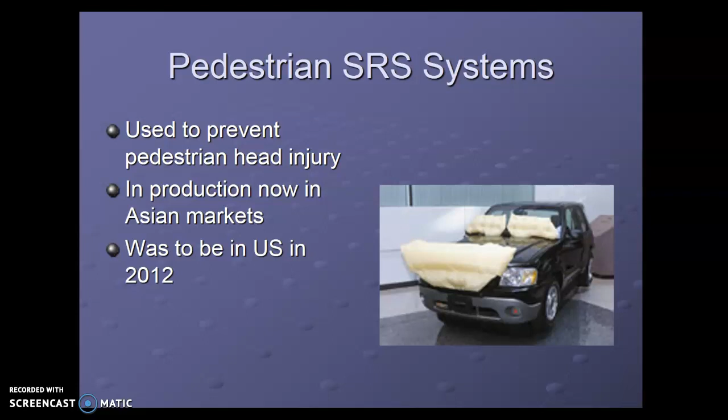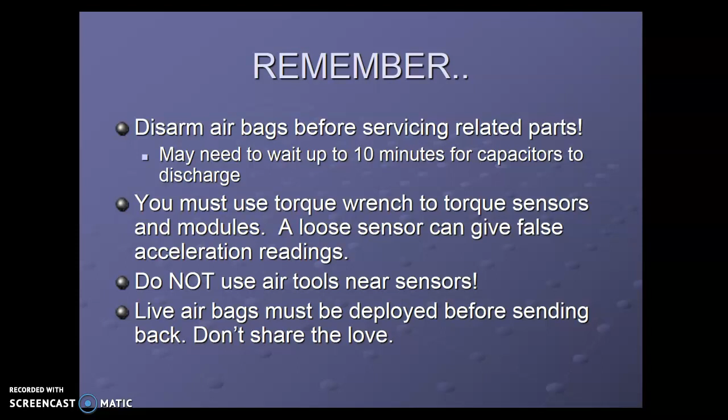Live airbags must be deployed before sending back. That is basically for recalls, if you have to ship them, etc.

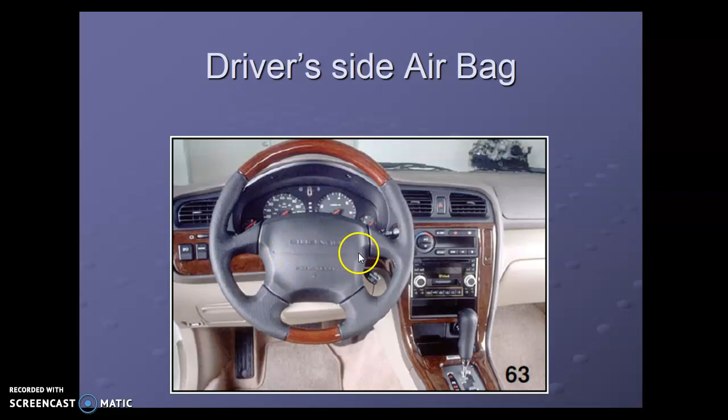Driver side airbag — most of you are familiar with that in the steering wheel area. There's a seam designed as a weak link to open up for the airbag to come out. The multi-stage, as we mentioned earlier, uses those two squibs to control the rate of inflation.

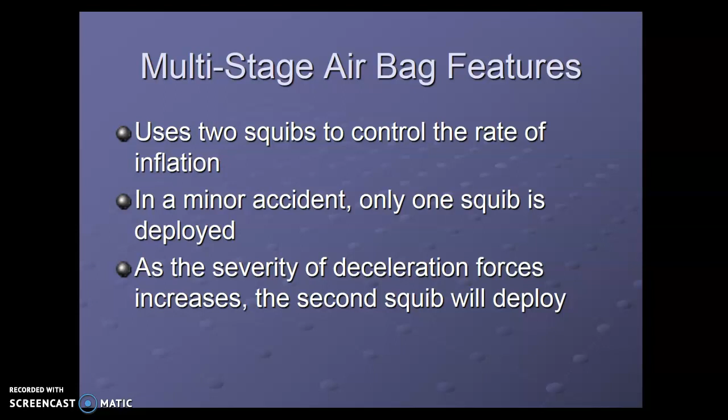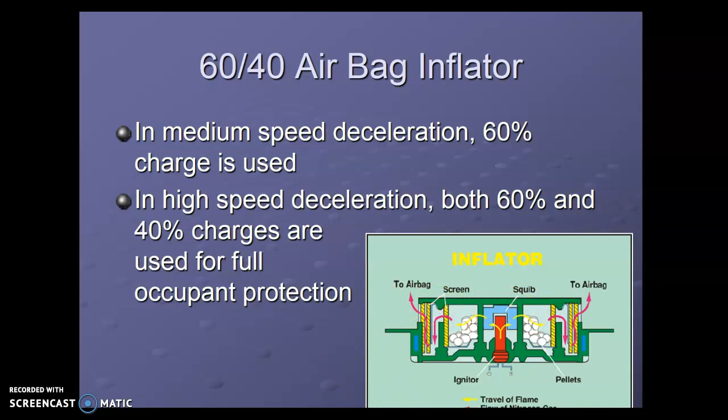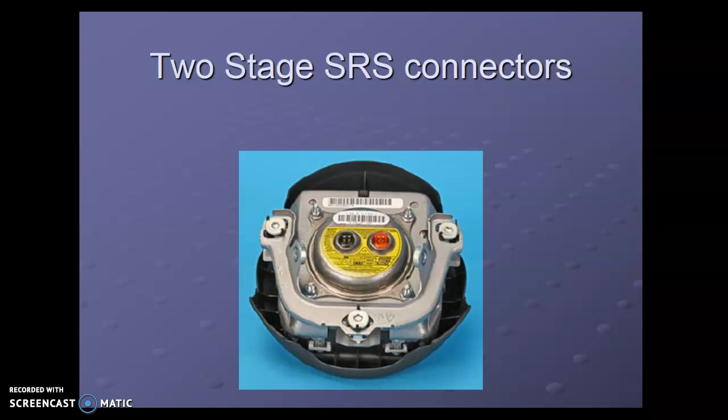In high-speed deceleration, the 60 and 40 charges are used together for full occupant protection. Here's your two stages, and again it depends on the system how they deploy that. Some systems are strictly two stages, some I've seen three, old ones were one. It just depends on the manufacturer and how they engineer it, I guess.

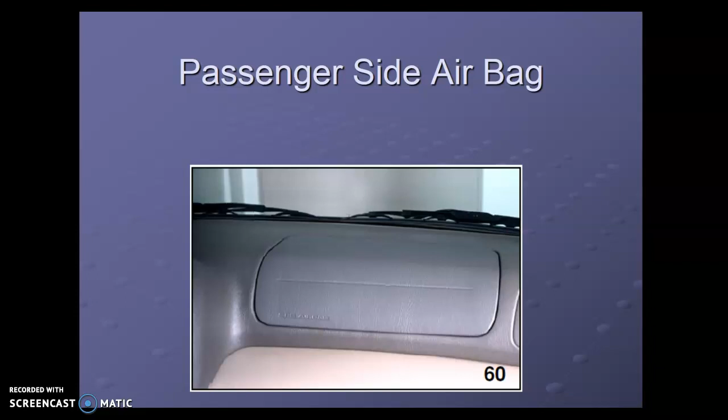Here's your passenger side and that split seam of the airbag where it's going to weak-link and come out. Something to know about the passenger side — they're much larger than the driver's side because they have to travel a greater distance, since passengers are usually further from the dash than the driver.

They deploy with the driver's side airbag on most systems. Some systems have cutoff switches, like pickup trucks where there's no back seat — could be an add-on kit, but you don't see that at all, since not many manufacturers want to modify the system for liability reasons. But most new vehicles either have a sensor or a switch that can turn off the passenger side airbag, and these are on vehicles that don't have a back seat.

So if you had to transport a child in a car seat, or even just in the front seat, you can turn off the airbag so it doesn't injure the child.

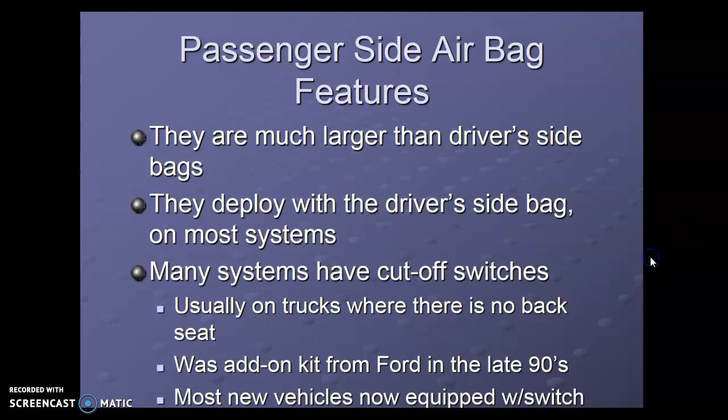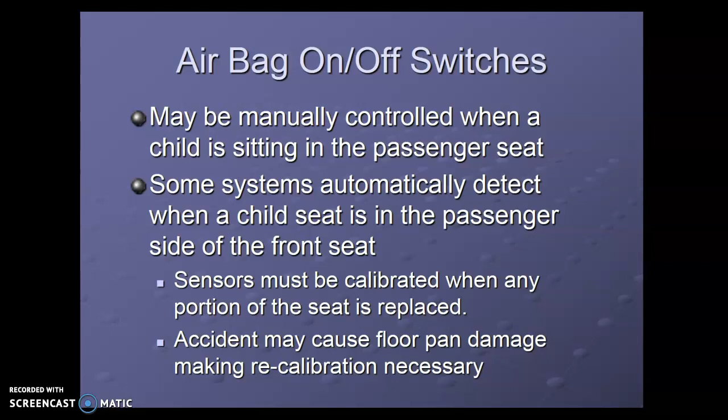Again, it could be manual — you can put a key inside there. Sometimes there are sensors that have to be calibrated, like weight classification systems. Some use electromagnetic fields to detect a child leaning against the side. It could be based on seat position and deactivate it that way. A lot of them have the ignition key go into a slot and turn to turn off the airbag for one trip, and it defaults back on the next trip. It just depends on the manufacturer's design.

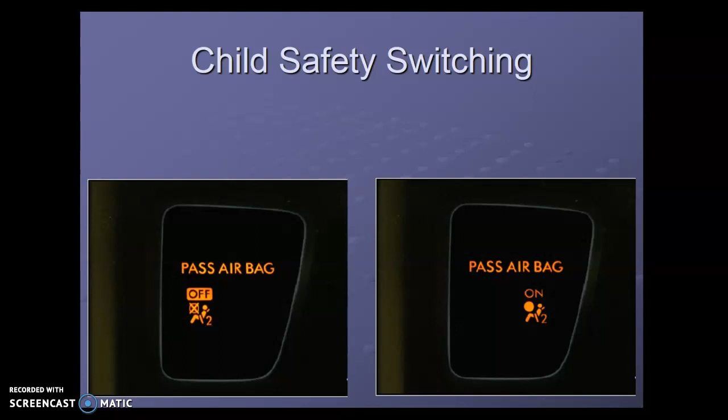Here's where you have your PAD, or passenger airbag deactivation lamp, showing whether it's off or on — that tells you right there on the dash somewhere, usually near the key, on a Ford system like that.

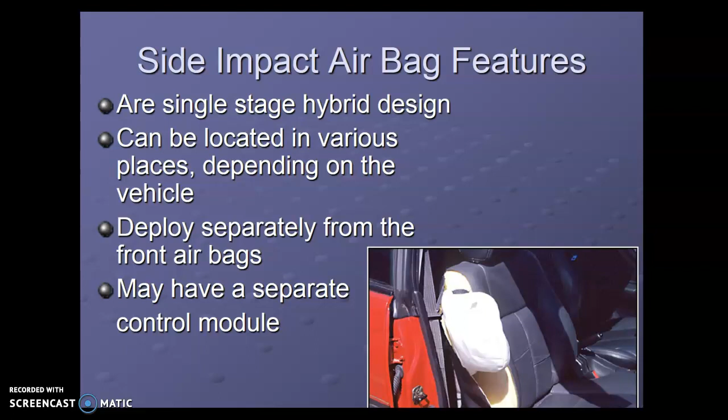Otherwise, that airbag can't come out and it's going to push the back right here and can cause damage and injury there as well. So make sure your systems work together with that seat cover.

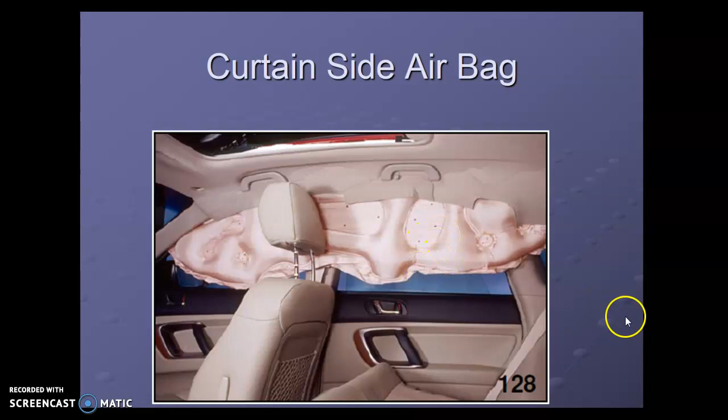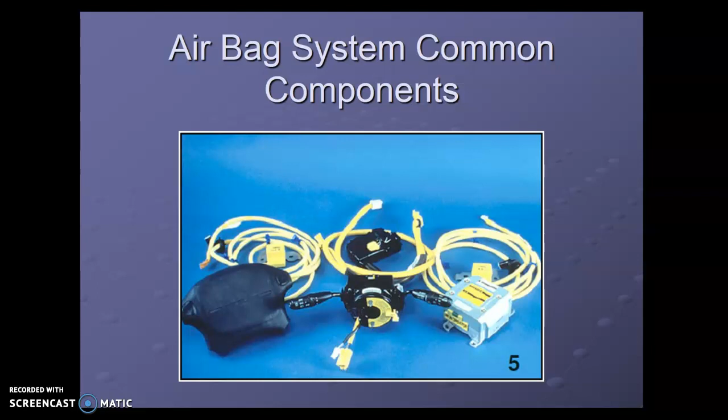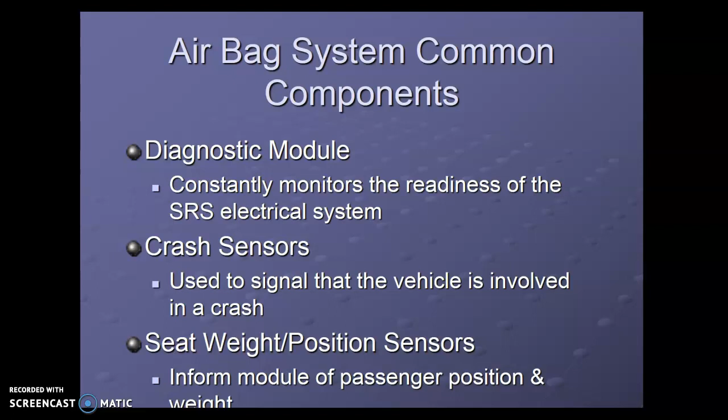So basic older systems were like this. They just deployed airbags based on inputs from the sensor. So that RCM, Restraint Control Module, also known as a diagnostic module, monitors all those sensors, including crash sensors, seat weight position sensors. It'll let the computer know if there's a passenger up front that's lightweight and turn off that airbag, or what stage to deploy it at.

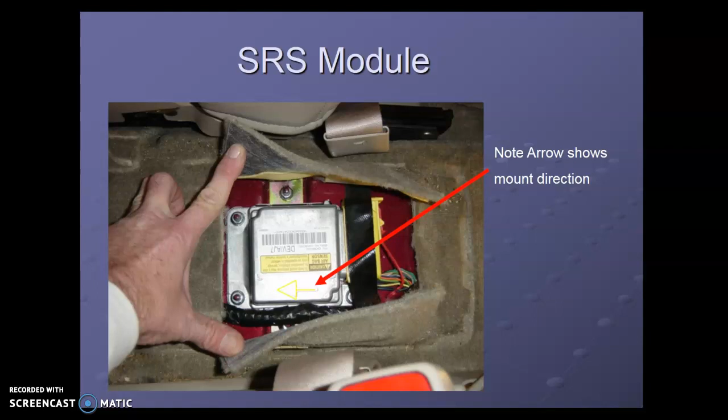So, diagnostic module self-test: when the key is turned on, the SRS module performs the following checks. Checks reserve power from capacitor, make sure it's good. That capacitor is there to deploy airbags in the event of the battery becoming disconnected in a collision, like if you're rolled over, let's say. Checks bulb condition, make sure it actually tells the driver whether or not the system's faulty. Checks crash sensors for shorts, opens, or grounds. Checks airbag resistance - it actually will check the resistance of the circuit through the squib.

If all that's okay, system's active. And then if you do get in an accident, the system will either store DTC and information to be retrieved later by investigators or the technician, depending on what happens with the car after collision. Insurance might need investigation, so that information is saved, kind of like a black box, quote unquote. Also, it's going to store DTCs for all these deployed sensors and airbags.

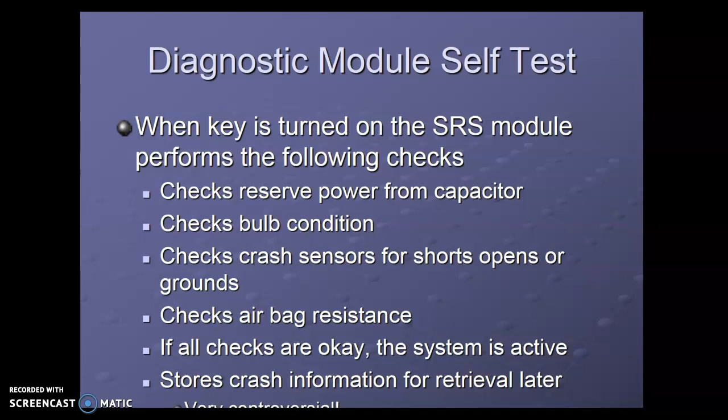So sometimes all that has to be replaced, and the cost of that is usually so high that it actually totals the vehicle. Sometimes you may look at a car that's been totaled and you thought, well, it's not that bad, I can fix it. But the cost of all those airbags, crash sensors, restraint control module can quickly add up to the cost of the 80% of the vehicle cap that the insurance will allow.

So a couple different types of sensors. Well, one we're going to talk about just real quick. Well, I should talk about two, but here's one. You think it's real complex, which is kind of funny.

When I learned how this works, I cut open one of these sensors and laughed, like, yeah, less is more. You have a bias magnet, a steel shot ball, and under a certain deceleration rate, the steel shot ball gets dislodged from the magnet. It's very calculated, and it makes contact across electrical contacts, sending a signal to the restraint control module, the diagnostic module. The arrows are critical for that dislodging to occur under deceleration, not acceleration.

Pretty cool. More complex systems now have a piezoelectric element that deflects under collision, sending an analog signal to the computer indicating the severity of the crash. As this wafer deflects and bends, it creates a variable analog voltage, and that signal is used by the airbag control module to determine what rate to deploy the airbags.

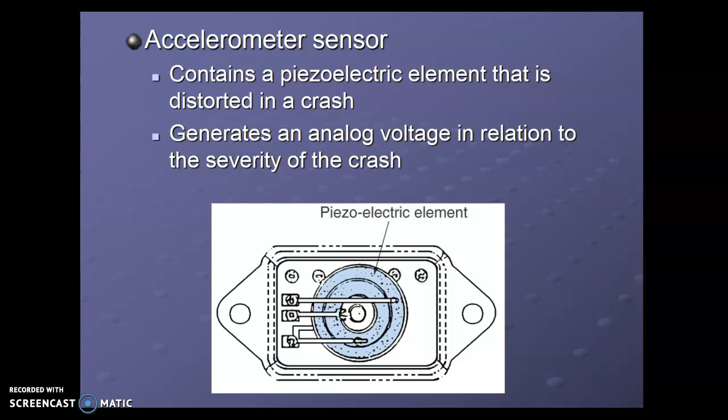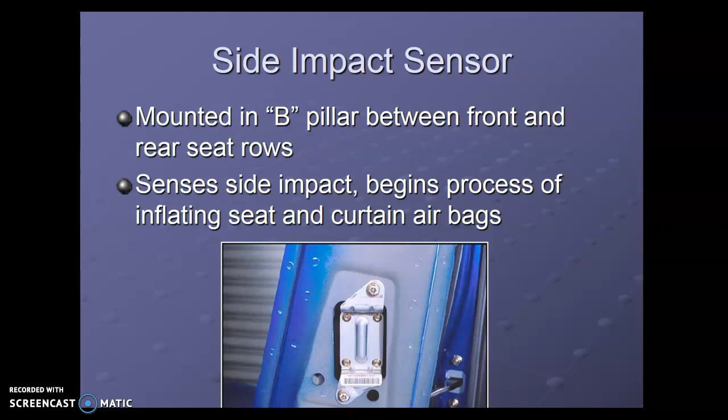Of course, there are multiple sensors coming in: the weight sensor of the passenger seat, the impact severity, what the car is doing, the speed, the load, etc. Side impact sensors, much like those front impact sensors, are mounted in the B pillar, C pillar, or could be down on the floor. They sense side impact and begin the process to inflate seat and side curtain airbags. They don't all deploy in the same crash, it depends on the severity and angle of the crash to decide which airbags deploy or not.

Here's your seat weight sensor. In the passenger seat, if you have a small child or person sitting there, you wouldn't want a full deployment of the airbag. So there's an occupant weight classification system, a little fluid bladder you sit in, or sensors on the track like this right here, to determine the weight of the person in the seat so they can deploy the airbag at the correct rate.

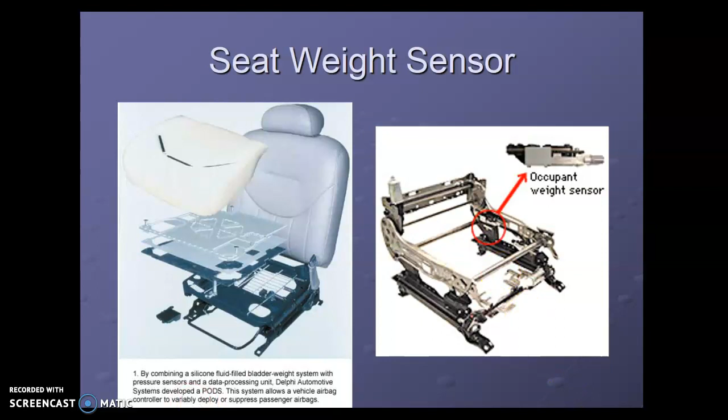We also have this E-field sensing, kind of newer technology, to tell if you're leaning against a door. It's not going to deploy the side airbag, or the door-side airbag, on the torso side of this airbag here.

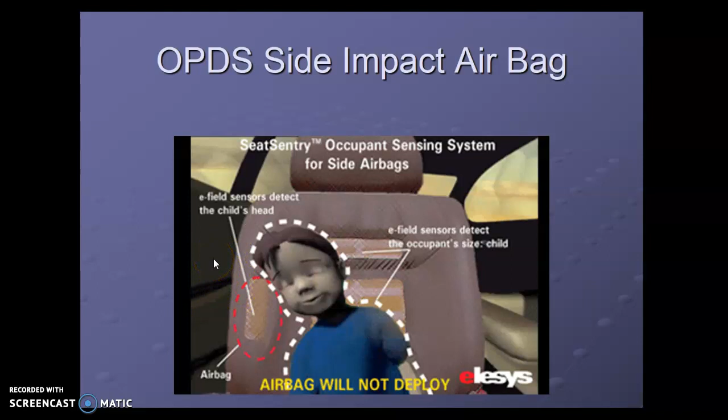But as technicians, to make sure these systems work, I always like these plastic butt cheeks. They're a special weight, you put that in there, hook up your scan tool, and then you can determine if the sensor is gauging the correct weight. These are calibrated at a specific weight, and you can look and adjust accordingly to set them back up to the appropriate cut point.

So that's another thing the techs do. Never thought you'd do that, right? Put a plastic butt on a seat and program it, but here you are.

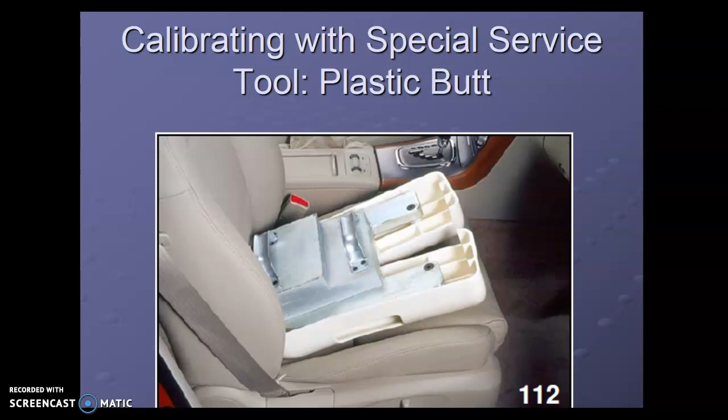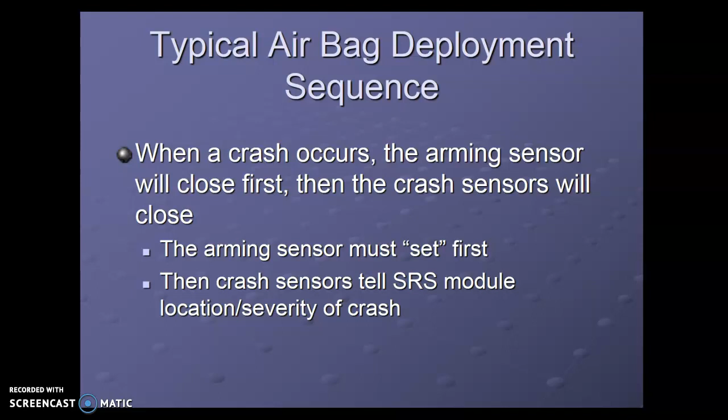If you watch in slow motion on those crash tests, when the vehicle hits the wall or an oncoming vehicle, before the occupant's head lifts off the seat, that airbag's already deployed and deflating as the head hits the airbag. It's crazy how fast this happens.

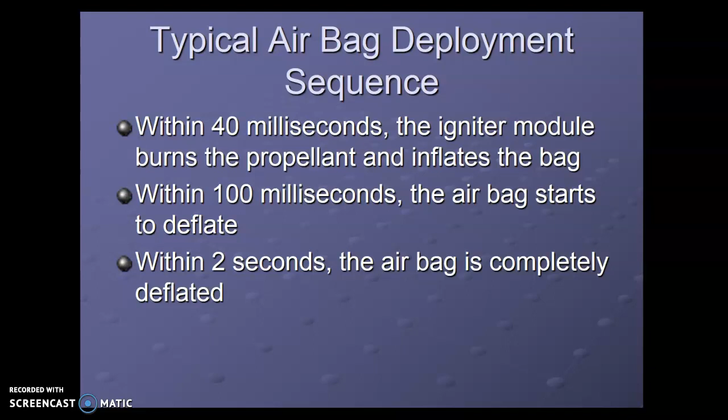And of course, all of this is gold plated for speeds, for low resistance and corrosion resistance. So pretty cool, that's basically it for supplemental restraint systems as far as this lecture. What I'm going to attach after these videos, you'll see some more demonstrations of crash test rating systems and the importance of crash testing.

So big key takeaways: wear your seatbelt, get your airbags checked, keep your seat not too close to the airbags, make sure your seat covers work with side airbags, and understand the process to deactivate the airbag system if you have to remove those parts or recalibrate those sensors.